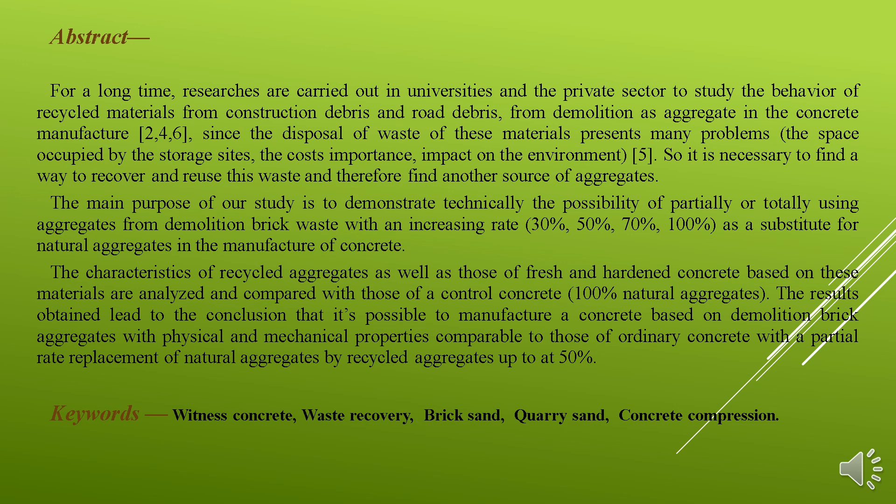This work is divided into two important parts. The first part is the characterization of the materials used, such as cement, sand, and gravel. We start with the cement. The cement used during the study is sulfate-resistant cement from Ain El Kebira, Setif. The second material is the natural sand of fraction 0/3 and brick sand 0/3, the gravel 8/15 and the gravel 15/25. These are their characteristics, which are presented in the following table.

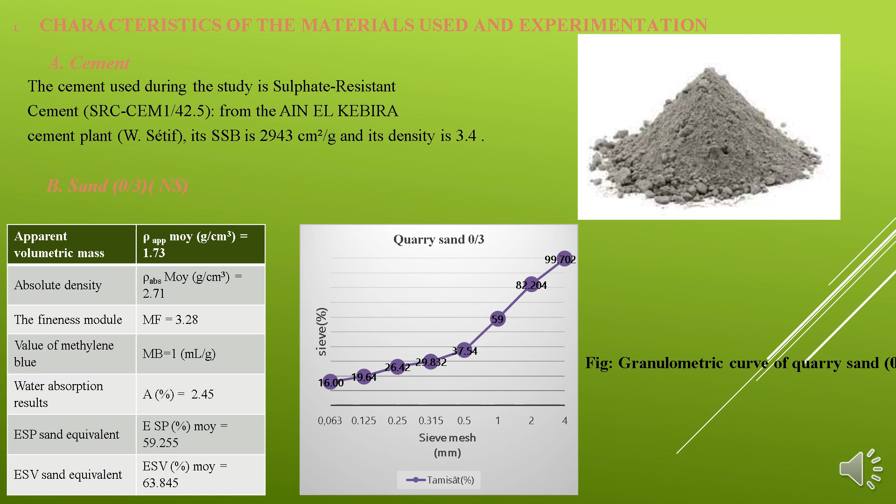Also the granulometric curves of quarry sand, brick sand and gravel. This is the brick sand. And this is gravel 8/15. Finally, this gravel is 15/25. Okay, that's all I would like to say about this.

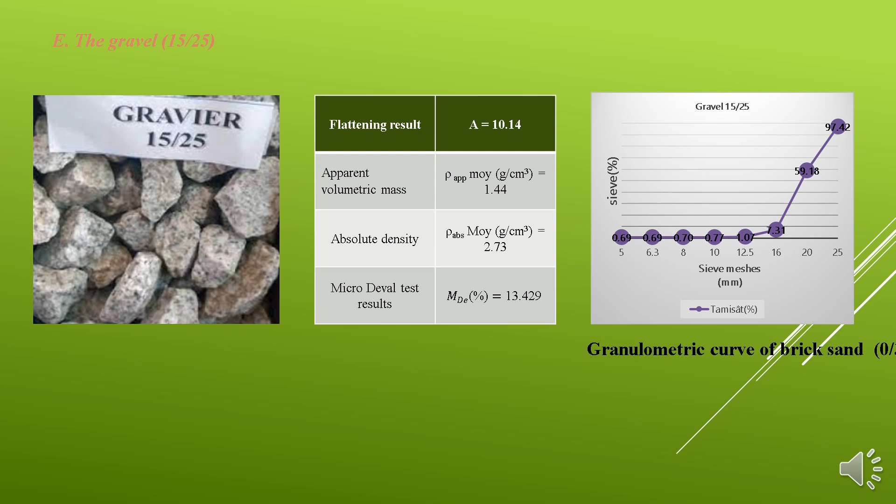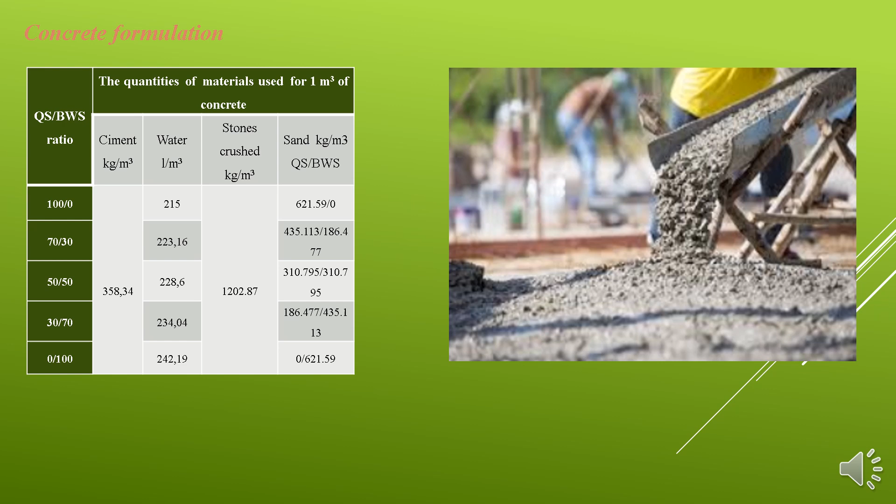Now, let me move on to the next part, consisting of the concrete formulation. In our project, the method of absolute volumes developed by Professor Skramtaev has been adapted to formulate our concrete. The complete formulation of the 1 cubic meter concrete mixtures for a cement dosage of 358 kilograms per cubic meter is in the following table.

This brings me to my third point about analysis and discussion of results. This part is actually divided into two axes. The first axis is the fresh state of concrete and the second axis is the hardened state of concrete. We start with the fresh state. At this stage we study and inspect the concrete in its fresh state. In the beginning we started with the slump test, as the picture shows, and the slump values of each concrete type are shown in the following table.

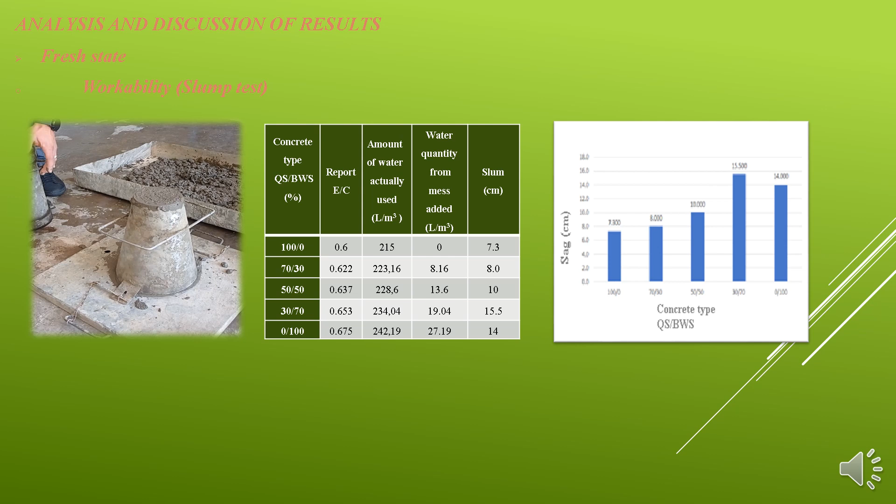And from the curve which shows the different slump values, we note that the mixing water actually used to ensure this slump increases according to the rate of substitution in recycled aggregates on the one hand and the type of aggregate on the other hand.

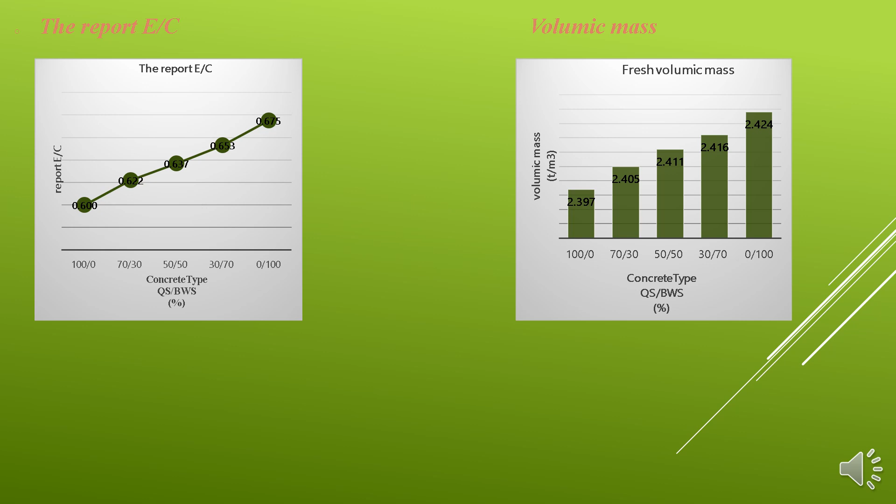Now, let me turn to the W/C ratio and volumic mass, or density. From the curve of W/C, this ratio of the same concrete composition increases proportionally with the rate of recycled sand in the concrete mix. With the curve of volumic mass, we try to make a comparison between the hardened and the fresh state. So, the densities of the prepared mixtures are variable, depending on the variant and the age, 7 and 28 days. This is attributed to the evolution of cement hydration reactions, which fill the pores in the mixture. Also, this variation can be explained by the percentage of introduction of brick sand, either by addition or substitution.

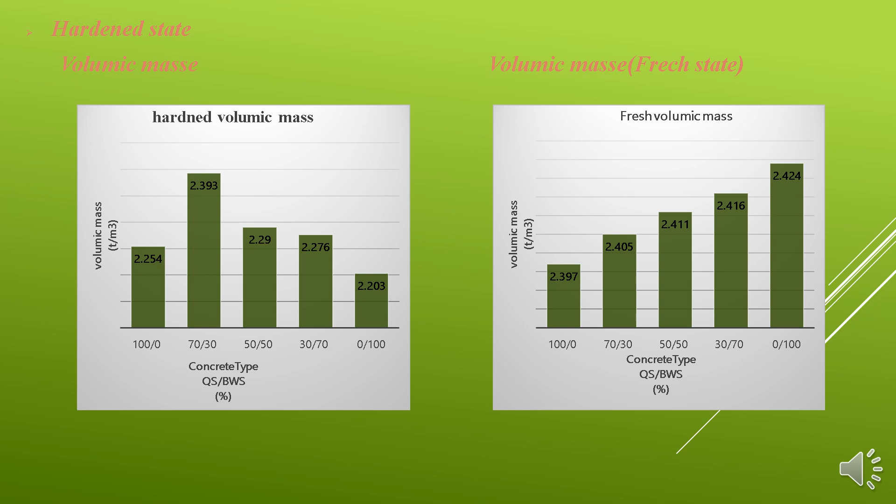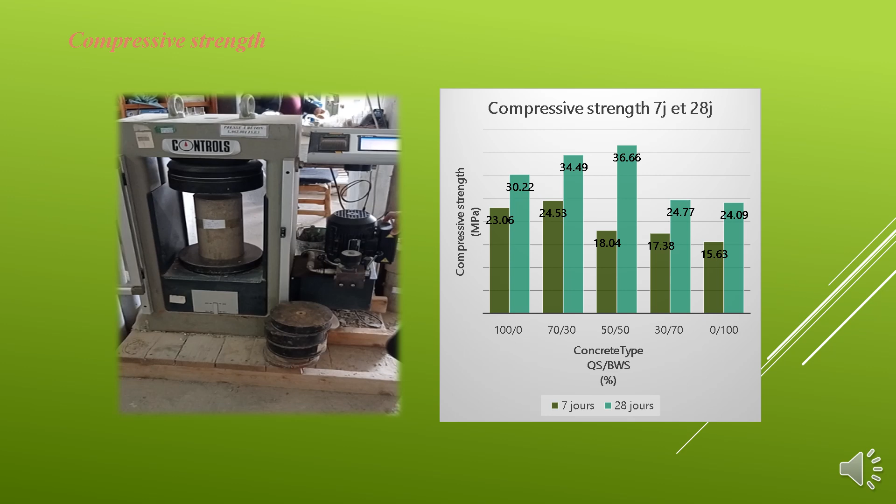Finally, we will discuss the last test, the compressive strength, as shown in this figure. According to the curve and to this analysis at 7 and 28 days, it can be concluded that the compressive strength decreases markedly as soon as the rate of replacement of natural aggregates by recycled aggregates exceeds 50%, and that this reduction can exceed 10% of the resistance of the control concrete, so 100% natural aggregates.

Lastly, I will conclude my presentation. At the end of the study, the following conclusions can be drawn. The densities of the prepared mixtures are variable depending on the variant and the age, 7 and 28 days. It is noted that the density of the different mixtures increases following an increase in the percentage of recycled sand in each concrete mixture. The types of concrete batches are prepared with an imposed slump between 7 and 15 cm. The W/C ratio of the same concrete composition increases proportionally with the rate of recycled sand in the concrete mix.

According to this analysis, at 7 days and at 28 days, it can be concluded that the compressive strength decreases markedly as soon as the rate of replacement of natural aggregates by recycled aggregates exceeds 50%, and that this reduction can exceed 10% of the resistance of the control concrete.